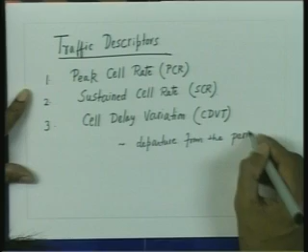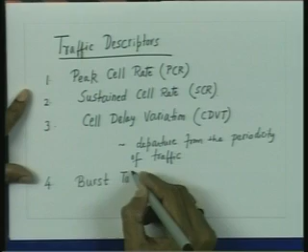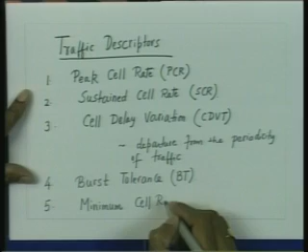So, the traffic descriptors which have been specified by the ATM standards are: 1, peak cell rate, which is called PCR. 2 is sustained cell rate. 3 is cell delay variation, or what is called CDVT. Now, the cell delay variation is a measure of the departure from the periodicity of the traffic. Then we have the measure of the burst tolerance, BT, and fifth is the minimum cell rate, or what is called MCR.

Now, the sustained cell rate is actually a measure of the average rate which the traffic will have, and on the other hand the cell delay variation is the departure from the periodicity of the traffic, maybe the departure from the constant bitrate traffic or the peak cell rate. The burst tolerance is a measure of the maximum back-to-back packets that can be sent, especially for the bursty kind of VBR traffic, and the minimum cell rate is the minimum data rate that is required to be guaranteed to an ABR traffic.

So typically a CBR traffic may be characterized by the peak cell rate and its departure from this periodicity, which is CDVT, cell delay variation, and a VBR bursty traffic can be characterized by the 4 parameters, that is the peak cell rate PCR, sustained cell rate SCR, cell delay variation and the burst tolerance, and on the other hand the ABR traffic can be characterized by the minimum cell rate.

Now the other problem is that when a source specifies its traffic characteristics in terms of these traffic descriptors and also specifies the quality of service attributes that the source wants, then how will a network determine whether the call can be accepted or not? That means how will a network determine whether the traffic is admissible or not? For that the network requires 2 components. The first is that a network must determine whether the traffic source is conforming to its advertised traffic descriptors or not, that is, whether it is conforming to its advertised traffic characteristics or not.

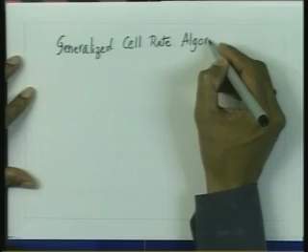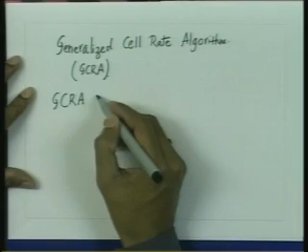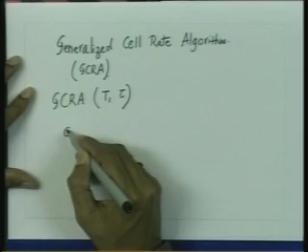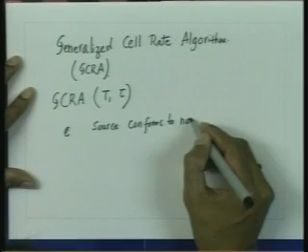Now the ATM forum has standardized an algorithm called generalized cell rate algorithm, GCRA. Typically it is specified by GCRA T tau. The idea being that if a cell or a traffic source conforms to the nominal rate of 1 by T, then tau is a measure of the tolerance. So the source conforms to a nominal rate of 1 by T subject to tau tolerance limit.

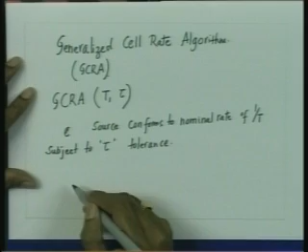Now how does it happen? Let me just explain whether the source is conforming to the GCRA T tau parameters or not. Now one thing I would like to say is that this is a method of specifying the traffic characteristics through deterministic bounds. So basically we are specifying some kind of a deterministic envelope on an otherwise statistical bursty VBR traffic. So let us see how we can specify that.

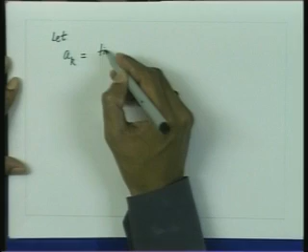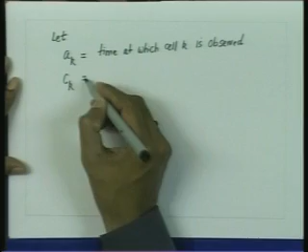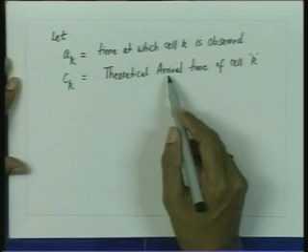Now let AK be the time at which cell K is observed. And CK is what is called the theoretical arrival time of cell K. Now theoretical arrival time is the time at which the cell should arrive theoretically, and AK is the time at which the cell K has been observed or it has come.

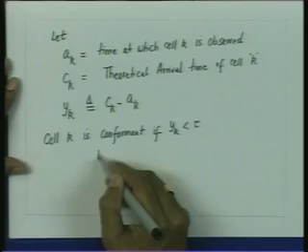Then let us say YK is CK minus AK. Then we say that cell K is conforming to this GCRA T tau if YK is less than tau. That means the difference between the time at which the cell has actually come and its theoretical arrival time should be less than tau. Then the cell is conformant. It is conformant if YK is less than or equal to tau, and it is non-conformant if YK is greater than tau.

Now the theoretical arrival time of the K plus 1th cell, CK plus 1, will remain CK if the cell was non-conformant, that is YK is greater than tau, or else it will be set as maximum of AK, CK plus T if YK is less than or equal to tau. That means if the cell is conformant, then it will be set to maximum of AK, CK plus T. Now essentially tau is measuring the departure from the nominal rate, which is 1 by T.

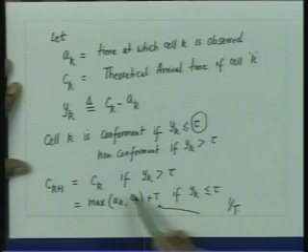Now what is really important for the cell to be conformant is that the difference between its theoretical arrival time and the actual time at which it has arrived must be within tau limits. Otherwise, if it is greater than tau, the cell will be non-conformant. And the late arrivals of the cells will actually delay the possible allowable theoretical arrival times of the K plus 1th cell, as we can see from these equations.

Now let us consider an example to explain this point. Remember that a VBR traffic is generating a bursty variable bitrate characteristic. What we are trying to see is whether the arrival times of the traffic which is getting generated are conforming to these GCRA T tau parameters or not.

Now, for an example, consider that we have GCRA(10, 3) as a parameter. Let us see how an example like GCRA(10, 3) works.

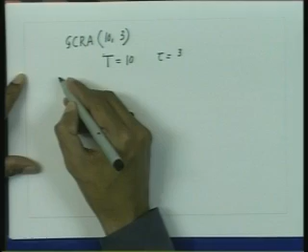Now what is the meaning of GCRA(10, 3)? Here T is 10 and tau is 3. Now let us say that C0 is 0, and consider an example where the arrival times are 1, 8, 19, 27 and so on. Now let us try to see whether, as per the arrival times, they are conformant to these 10, 3 or not.

Now the interpretation of this is that the nominal arrival rate is 1 by 10, with a periodicity or with a departure or with a tolerance of 3. That means the cells are expected to arrive at 0, 10 and so on, but there could be a departure subject to the tolerance of 3. Now let us see whether these cells 1, 8, 19, 27 are conformant or not.

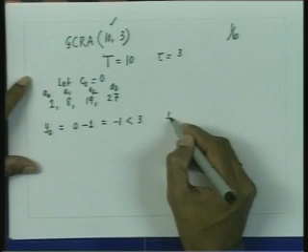So what is Y0? Now Y0 happens to be 0 minus 1, that is C0 minus A0. Now remember that these are A0, A1, A2, A3. So this is minus 1. Minus 1 is less than 3. So definitely cell 1 is conformant. Now since it is conformant, what will be the expected theoretical arrival time of the next cell?

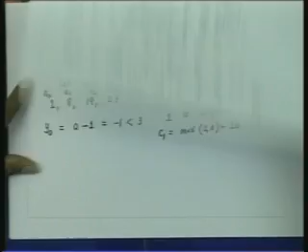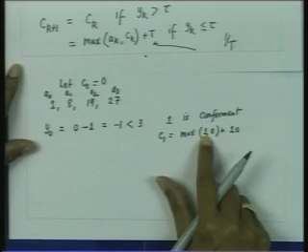The expected theoretical arrival time of the next cell C1 will be set as max of 1, 0 plus 10, as per our earlier formula. That is, max of Ak, Ck plus T. So C1 is max of 1, 0 plus 10, which gives us 11. So since the cell has arrived at 1, the expected theoretical arrival time of the next cell is required to be 11. But the next cell actually arrives at 8; it arrives earlier.

So let us try to see whether it is conforming to the GCRA(10, 3) or not. So what is Y1? Y1 becomes 11 minus 8, which is equal to 3, and since 3 is less than or equal to 3, 8 is conformant. Since 8 is conformant, we need to set the next arrival time, which is C2, and C2 will be set as max of 11 and 8 plus 10, which will be set as 21.

Now what about Y2? Now the cell has come at 19. So C2 was 21. 21 minus 19 is 2, and 2 happens to be less than 3. So indeed the cell 19 is conformant, and since the cell 19 is conformant, C3 is set as max of 21 and 19 plus 10, which is 31.

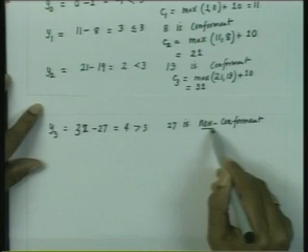What has happened? The GCRA(10, 3) specification says that since the previous cell had come at 19, the next cell can actually come at 31 only. Now the next cell is coming earlier, at 27. If it had come at 28, then the difference would have been 3 and the cell would have been conformant. But since it came a little earlier, it is a violation of the departure from the periodicity, and therefore this cell will not be allowed. So it is indeed a non-conformant cell.

Now another way of representing this GCRA(10, 3) is by what is called a leaky bucket algorithm. Popularly, GCRA(10, 3) has been implemented as a leaky bucket algorithm. I'll explain through the same example how things can be interpreted in terms of the leaky bucket algorithm. But before that, in practice, a traffic source is generating variable bitrate bursty data. Now suppose it has negotiated with the network that it will specify its traffic descriptors in terms of certain T and tau parameters.

Okay. Now the network knows that the source will be transmitting its data in such a manner that it conforms to these T and tau parameters, but the source of course is generating a variable bitrate or bursty data which is essentially statistical in nature. Then what do you do at the source?

At the source we will put this GCRA(T, tau) traffic shaper, whose output will conform to these GCRA(T, tau) parameters. At the network we will put a similar GCRA(T, tau) traffic regulator or traffic monitor, which will see whether the cells which are coming from the traffic source are conforming to those T, tau parameters or not.

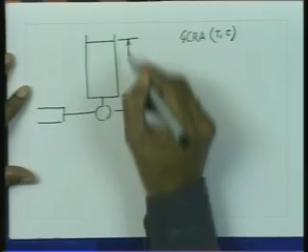So now let us see its interpretation in terms of a leaky bucket. Now leaky bucket interpretation is something like this. This is a leaky bucket for GCRA(T, tau). This bucket has a maximum depth of T plus tau. Fluid accumulates in the bucket at unit rate.

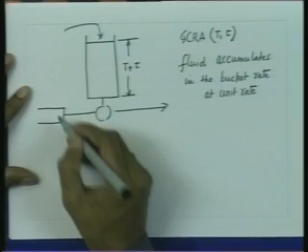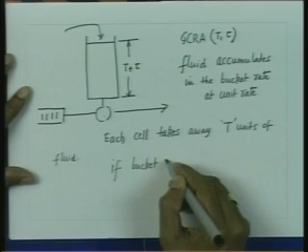Okay. Now the cells are coming. Whenever a cell comes, it takes away T units of fluid. So each cell takes away T units of fluid. Now if a cell comes and it finds that the fluid contained in the bucket is less than T, so if bucket content is less than T, then the cell becomes non-conformant.

Now, if we are putting this device at the source, then if a cell comes and it finds that in the bucket there is less than T units of fluid, the cell will simply wait in the buffer, and it will be transmitted only when the content becomes at least equal to T in the bucket.

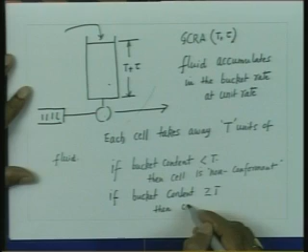But if this device is put at the network side, and a cell comes and finds that the bucket does not have enough fluid, then obviously that cell is not conforming to GCRA(T, tau), and the network may drop this cell because it is not conforming to the advertised traffic contract. Now, if bucket content is greater than or equal to T, then of course the cell is allowed to pass through, and the content of the bucket decrements by T.

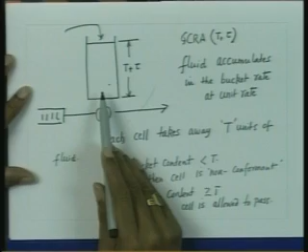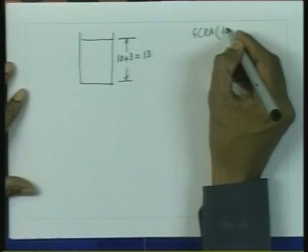Now, let us take the same example that we had considered. The example we took was GCRA(10, 3), and we will try to explain it with the leaky bucket. So what does it mean? Initially the bucket contained T plus tau, which in this case is 10 plus 3, equal to 13. Okay. So here is a leaky bucket structure.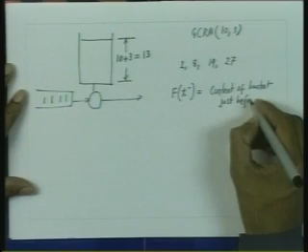Now, these cells are coming at different times, and we had assumed that the cells come at times 1, 8, 19, 27. Now, let f(t−) denote the content of the bucket just before time t, and f(t+) denote the content of the bucket just after t. Now, let us see what happens.

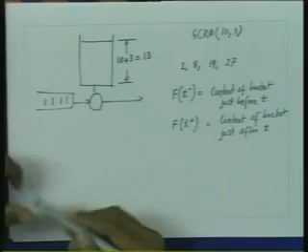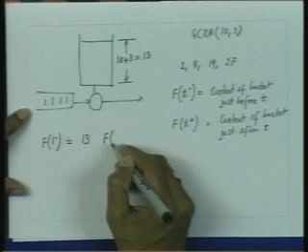The first cell comes; at that time the content is 10 plus 3, 13. So f(1−) is 13. Now this cell comes at 1 and takes away T units of fluid. So when this cell goes, f(1+), the content becomes, sorry, 3. There were 13, you take away 10 units of fluid, and the content becomes actually 3, not 1.

Now, f(8−): already 3 units of fluid were there, and from 1 to 8 a total of 7 units of fluid will accumulate, since we are assuming fluid accumulates at unit rate. 3 was already here, so f(8−) is 10, and f(8+). Let us say this is the cell which has come at 1 and this is the cell which has come at 8.

So, at f8 plus the content will become 0 because it will get decremented by 10. So there will not be any fluid remaining now at f8 plus. Now, the third cell is coming at 19. So at f19 minus, the content in the bucket would be how much? Here there was 0 at 8 plus, and up to 19 we would have accumulated the content to be 11, and therefore at f19 plus, the content would become 1. So therefore this cell will be conformant, this cell will be conformant, and this cell will be conformant.

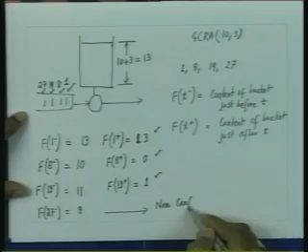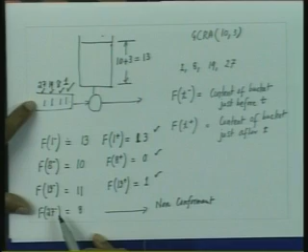Now, if we are using this device at the source, then this cell 27 has to wait in the buffer, and how much time does it have to wait? It has to wait for 2 more units of fluid to get accumulated. That means it has to wait till the time becomes 29, and at time 29 minus the content in the bucket would become 10, and then the cell can be passed through.

So now we have seen how this can be implemented in terms of a leaky bucket algorithm. Although, for explanation purposes, we are saying here that the fluid accumulates in the bucket at a unit rate, and a cell takes away capital T units of fluid whenever it comes, in practice it will be implemented simply as a counter. So a counter has a certain maximum value up to which it can count, and in this case it is T plus tau.

So the counter is incremented at a unit rate, it keeps on counting, and whenever a cell comes, the counter needs to be decremented by capital T. And if by decrementing by capital T the counter does not become negative, that means you can decrement it by the full capital T amount without becoming less than 0, then that cell is conformant and it is allowed to pass through, and the counter is decremented by the capital T amount. So this can be simply implemented as a counter.

Now remember, again, at the traffic source this works as a traffic regulator or a traffic shaper, and at the network side it works as some kind of a traffic monitor. Now as we have seen, the traffic descriptors which a network asks the source to specify are something like peak cell rate and the cell delay variation tolerance. So now let us see how these conform to those kinds of traffic descriptors. Let me just explain that.

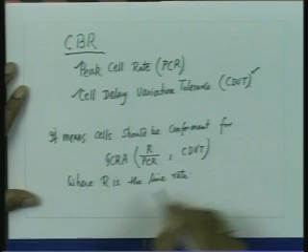Where R is the line rate. Now what does it mean? It actually means that the cell can come at the peak cell rate, but the CDVT, that is the cell delay variation tolerance, actually measures the departure from its exact periodicity.

So now let us say, for an example, that if I say GCRA(5, 0), what is 5? 5 means that R by PCR is 5, and CDVT is 0. Now by saying R by PCR is 5, it actually means that the peak cell rate is 20% of the line rate. Peak cell rate is 20% of the line rate.

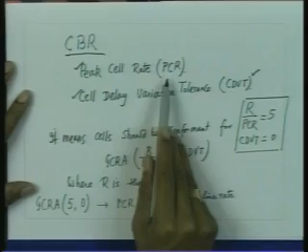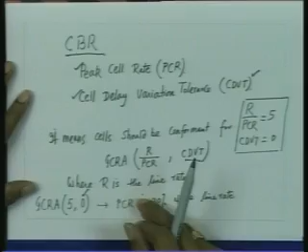What we are saying is that for the CBR traffic, it is expected that the cell should come at this constant rate PCR, but the cell delay variation will measure the departure from the periodicity. Now in this case, the cell delay variation tolerance, we are saying that it is 0. Now when we say that the tolerance is 0, then obviously the question is, in that case, what is the fastest cell sequence that is expected, and the fastest cell sequence that is expected will be

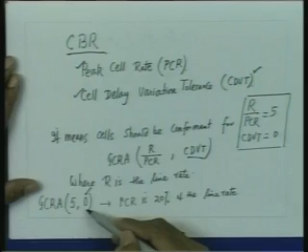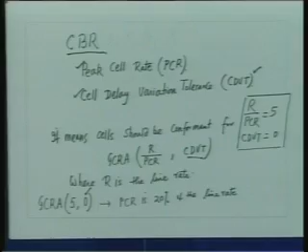If we had some cell delay variation tolerance, then it would have determined the departure from the exact periodicity, as we had considered in the previous example of GCRA(10, 3). Now GCRA(10, 3) means 10 is actually equal to the ratio of R by PCR. In that case, we are saying that the peak cell rate is 10% of the line rate, so the capital T is 10, but the tolerance 3 is measuring the departure from the periodicity of this constant bit rate source.

Now let us see how we can represent the burst tolerance. This is okay for the constant bitrate traffic, but what about the bursty variable bitrate traffic? Because the bursty variable bitrate traffic will actually also be sending back-to-back cells in the form of a burst. And for a long interval of time, it may not send any packets, and suddenly it may send a burst. So how do you represent such variable bitrate bursty traffic? Through a similar mechanism like leaky bucket.

Now let me just explain that through an example. Let us say that this time, instead of GCRA(10, 3), let us take an example of GCRA(20, 57). Now, let us say we have a traffic source, and the cells are coming at 0, 1, 2, 3, 4, and so on. These are the cells which are coming. Now let us see what happens.

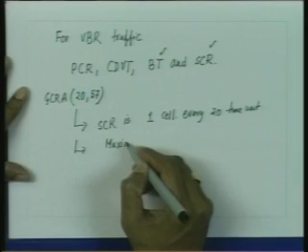So for VBR traffic, the ATM forum specifies that the source should be conforming to the peak cell rate, the cell delay variation tolerance, burst tolerance, and sustained cell rate. Now we just saw an example, GCRA(20, 57), which we said is representative of a sustained cell rate of 1 cell in every 20 time units and a maximum burst size of 4 cells back to back.

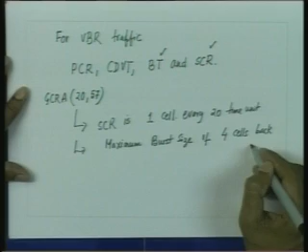We saw that those 4 cells back to back were sent as 0, 1, 2, 3, and later on they may be sent as 80, 81, 82, 83. So if you want to know the minimum time interval between cells, what is the peak cell rate? Obviously the minimum time interval comes out to be 1, and the cell delay variation tolerance comes out to be 0. So we say that this source is conforming to GCRA(1, 0) and GCRA(20, 57).

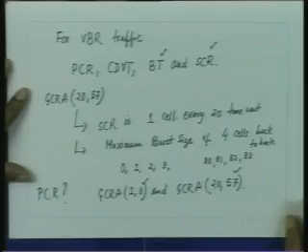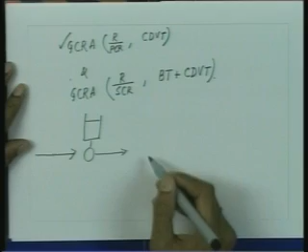The meaning of these parameters is that a VBR source should be conforming to GCRA(R/PCR, CDVT), cell delay variation tolerance, and GCRA(R/SCR, burst tolerance plus CDVT). What does it mean? If a traffic stream is coming, it should first pass through a leaky bucket which will make it conforming to GCRA(R/PCR, cell delay variation tolerance), and then it should also conform to GCRA(R/SCR, burst tolerance plus cell delay variation tolerance). It should be conformant for both.

This will give you that it is conformant to the minimum transmission time, or the minimum interval between the cells, and the other leaky bucket, that is R/SCR and BT plus CDVT, will give you that it conforms to the burst tolerance and the sustained cell rate.